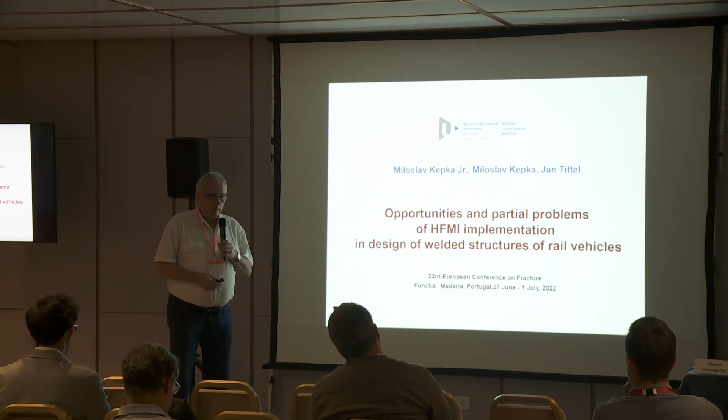Dear colleagues, I would like to say some words about the application of high frequency mechanical impact technology, which is done in our RTI Regional Technological Institute. It's a research center of Faculty of Mechanical Engineering in Pilsen. This contribution was prepared by my younger colleagues, my son and my PhD student, Jan Tittel.

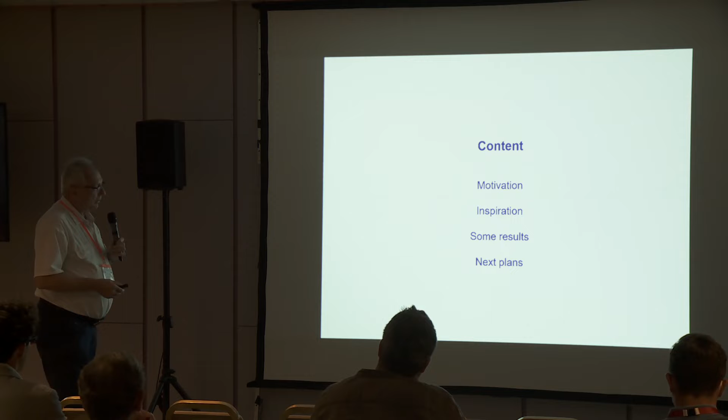They cannot be here, but I hope I will be able to show you what my younger colleagues have done till now in this area. The content of the presentation will inform you about our motivation and inspiration. Then I will show you some first results, and I would like to present our next plans.

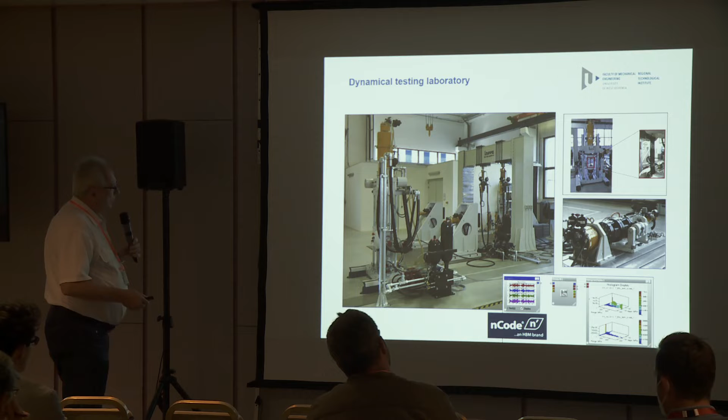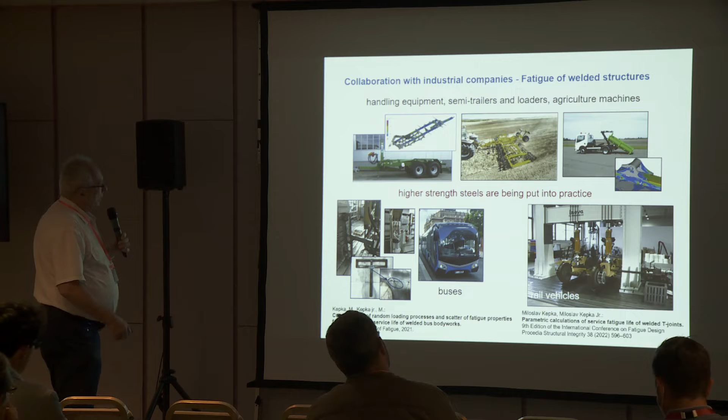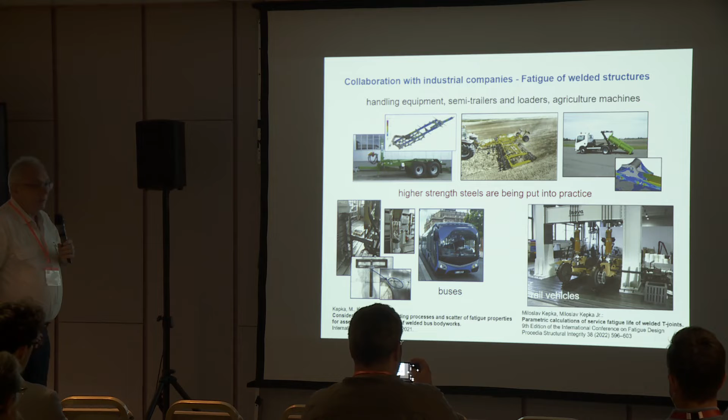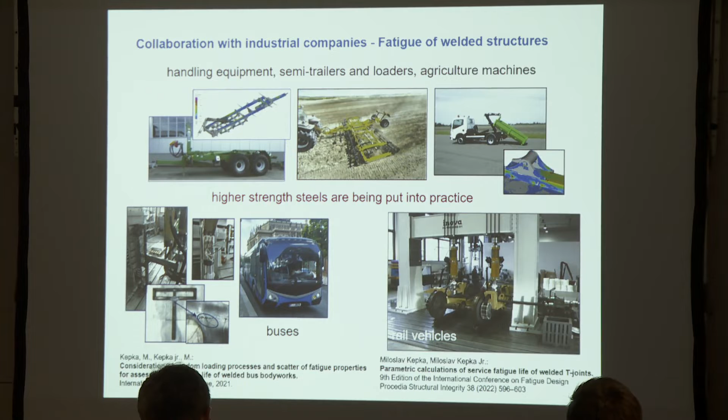According to our motivation, firstly, our research center is well equipped for fatigue life testing of materials and whole structures. We have a lot of collaboration with industry. You can see some products - we participated in development from the area of agriculture machines, handling equipment, buses and rail vehicles. All of these products are dynamically loaded structures, and all companies try to implement steel with higher strength into the products, and would like to use the higher strength in the area of fatigue too.

According to our motivation to discover something about the potential of HFMI technology, our first results were done in collaboration with a producer of agriculture machines. If we study some standards, we know that weldments of a specific category, meaning the shape and quality and type of welds, have the same FAT class - the same SN line for all steels up to approximately 960 megapascals.

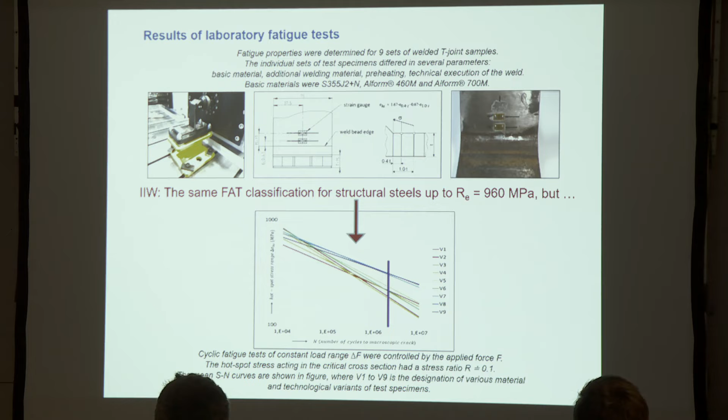In collaboration with this company, we performed fatigue testing of different combinations of steels with various strengths and various technologies, and you can see that the SN lines are different. The company decided to use the best combination of material, technology, preheating, additional welding material, etc., and to apply it in production. Results till now are okay - no cracks in operation of this very complicatedly loaded structure, as agriculture structures are.

For inspiration, we found our friends from Germany, from Karlsruhe Institute of Technology, Professor Ummenhofer, and in Stockholm, Professor Zuheir Barsoum, who is co-author of the International Institute of Welding recommendation about the application of HFMI technologies.

After consulting with them, we applied for a project with the Czech National Agency, the so-called Technological Agency of Czech Republic, and we obtained financial support for doing research in the area of rail vehicles, together with a company which produces trams, metros, and electric locomotives - Škoda Transportation - and together with the Czech Technical University in Prague, Department of Steel Structures, we have a project.

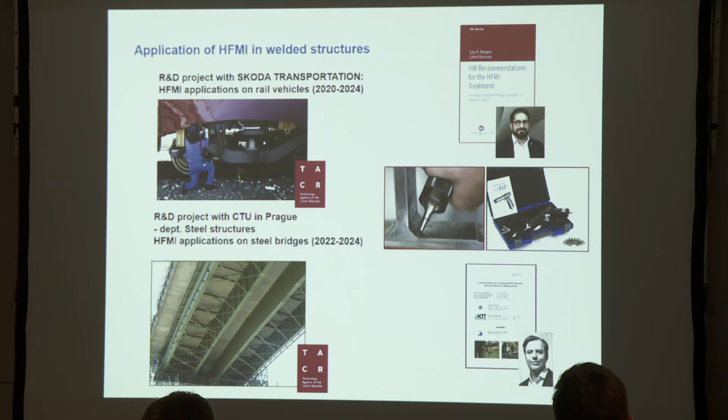Inside the project, applications of HFMI are involved too, for developing some mountable and demountable steel bridges for solutions to accident situations, or for military use, for example.

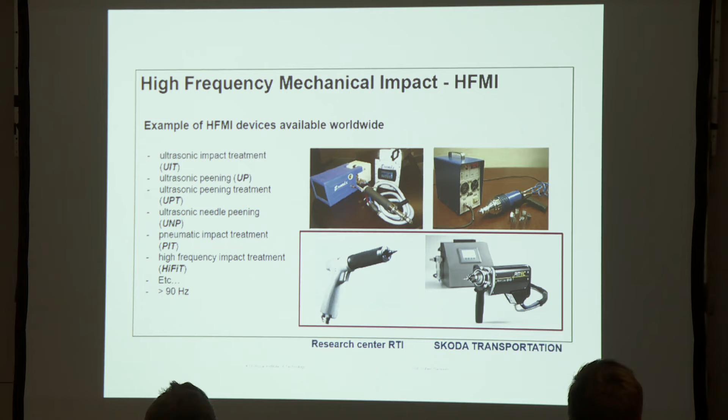For inspiration, I use some pictures from my friend Zuheir Barsoum. This is just an overview of some technologies which have the same name, HFMI. In Pilsen we have two pieces of equipment for this - our research center has a HiFIT device, and Škoda Transportation has available a PITEC equipment.

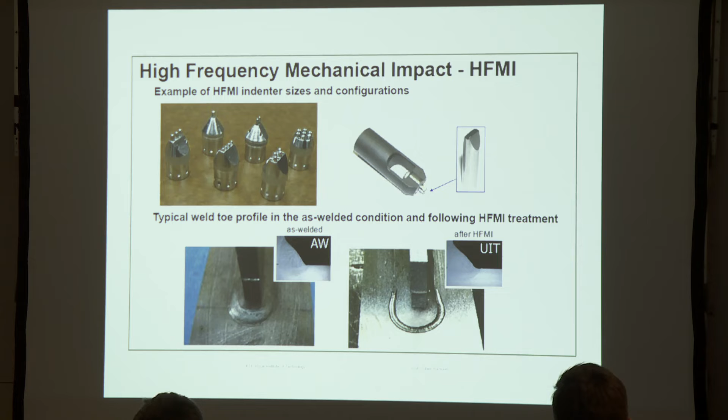The main part of this equipment are these indenters. With these indenters, welds are treated, and you can see that the notch at the weld toe becomes smoother. We can say that the microstructure near the weld toe is changed a little too, and mainly, compressive residual stress is introduced in the area of the weld toe.

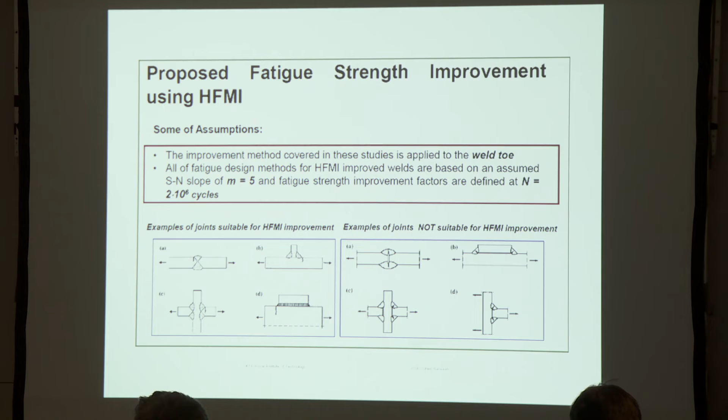Some weldments are suitable for application of this technology, some are not. Most of the work summarized results in this system show that the slope of the SN lines changed from approximately 3 to 5, and improvements by application of HFMI technology is described by a factor that allows use of a better fat class. The factor grows with the yield strength of the steel.

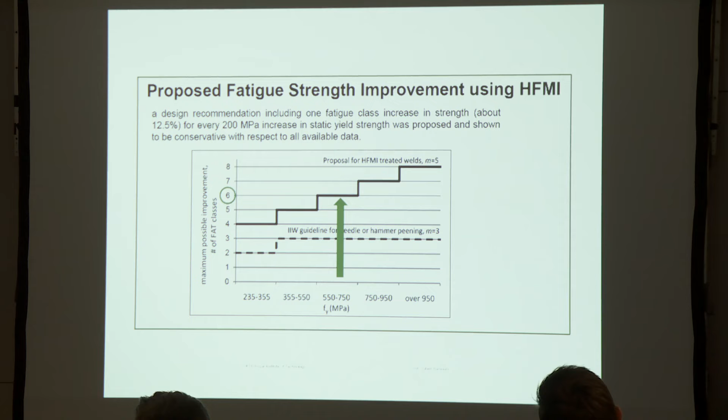On this picture you can see that for some details we have a fat class. For example, for some welds without application of HFMI, we have fat class 80, and with application, the same weld geometry and yield strength between 550 to 750, we can use a value 2 times higher for this fatigue strength.

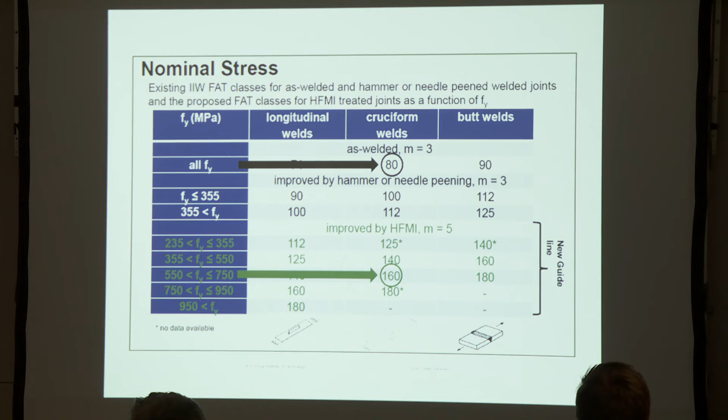Some results. With the first project, which started 2 years ago, we prepared together with Škoda Transportation a very ambitious testing program. We would like to test approximately 90 SN lines for various combinations, geometries and materials used by Škoda Transportation.

What's the result? The authority that has to approve, for example, a new undercarriage frame in Czech Republic - I don't know the situation abroad - does not respect using some improvement, for example hammering. The book prepared by Barsoum and Marquis is only a recommendation, not a standard. This means we need a lot of arguments for our institution in Czech Republic to use this technology.

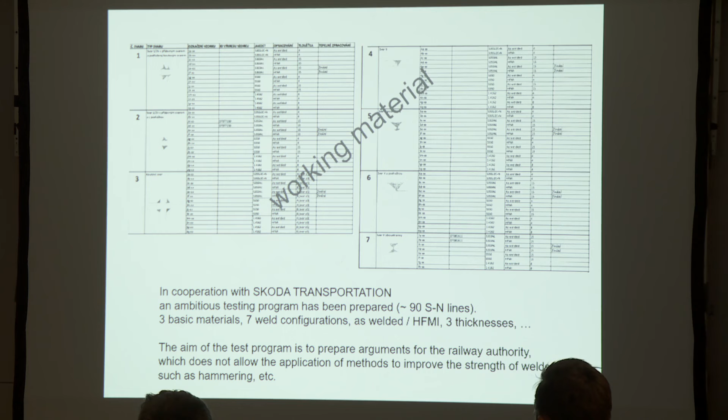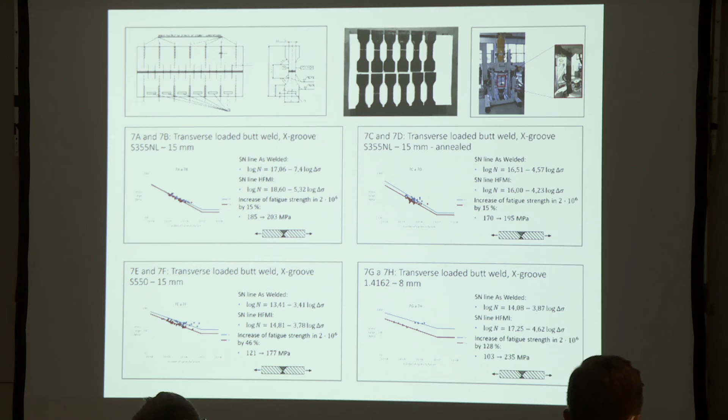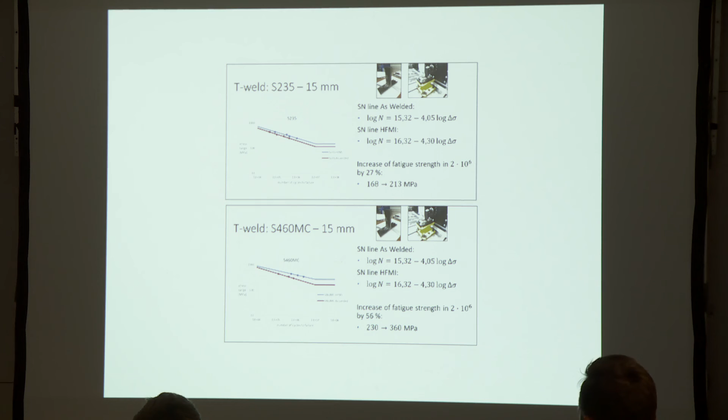We prepared another weld configuration, this T-weld. We have only started the investigation, with a very small number of results until now, but we would like to have more, and in collaboration with Stockholm, we would like to check the quality of welds with its system Winteria, which was developed by Professor Barsoum and his colleague.

Next plan. What is very important to notice is that loading effect is very important for this technology, because with the plus stress ratio you have a very optimistic improvement of the fat class. You must go down some class.

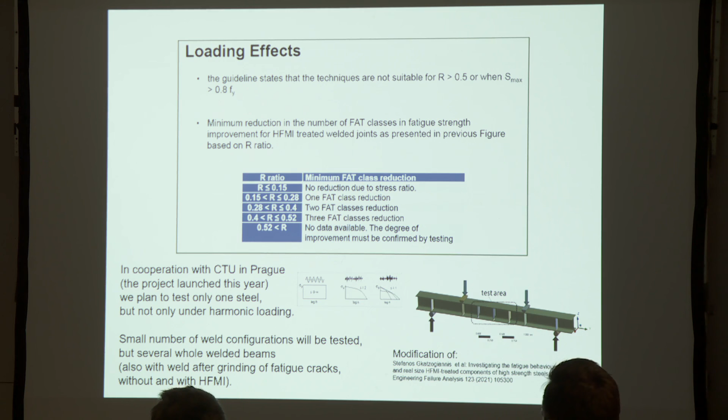You can see this reduction, and this is content of our project with Czech Technical University in Prague. In this project we will test only one or two configurations, but we would like to perform testing not only at harmonic loading, but at random loading, and not only specimens but whole structures, following the research performed by Professor Ummenhofer in Karlsruhe.

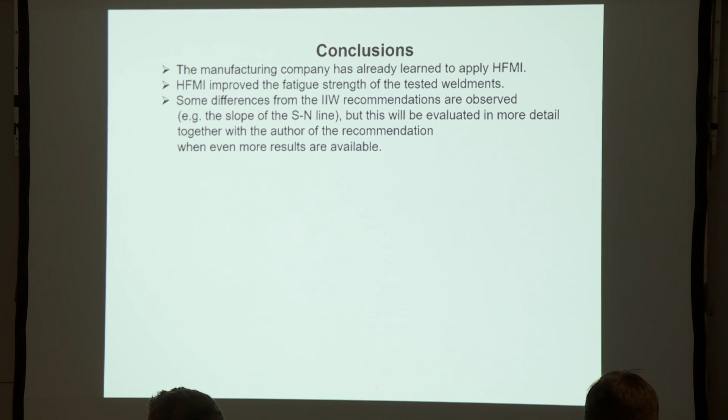Practical conclusions: the manufacturing company has already learned about application of HFMI and is able to apply it with some reliability and repeatability. HFMI improved the fatigue strength of tested weldments. We only found some differences from the recommendation - for example, the slope of the SN line varies around the recommended value of 5. I think we have to wait for more results, then discuss it with the authors of the recommendation. Maybe we have to fix the slope as one parameter and evaluate only the second.